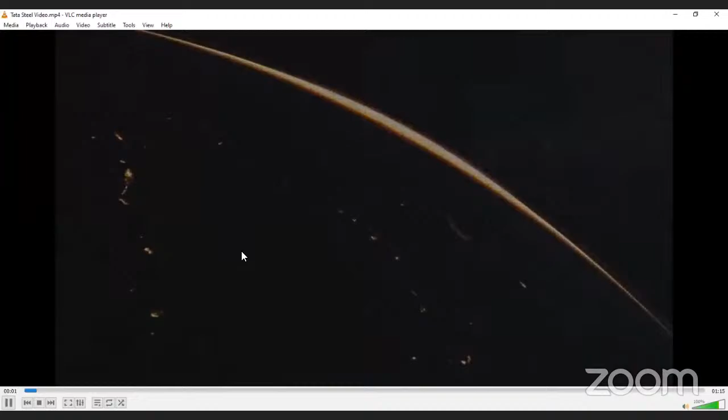Every living being needs a home, be it a hole in the wall or one with a swimming pool, be it on a high-rise or in the basement, be it a studio apartment or a grand piece of architecture, be it with a sky roof or one with an ocean view, be it a cabin in the mountains or a shack beside the sea.

Every living being needs a home, because only a home makes the world feel safer. This Environment Day, renewing our commitment to keep all homes safe, clean and green, and abundant with fresh oxygen.

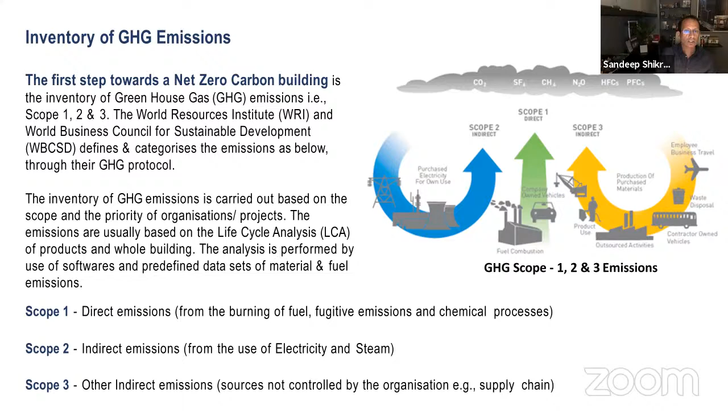The life cycle analysis is one of the important aspects for the carbon emission calculation. This is a very important chart. This tells you what is the current situation.

These are some of the very important abatement strategies. We as architects, developers, promoters, contractors, and everybody can adopt this - maximizing energy efficiency through passive architecture. Passive architecture plays a very important role. You have to have a climate responsive orientation of your buildings.

You have to have a proper envelope strategy. You have to use proper MEP and other engineering so that your reliance on active measures is less. Reduce operational energy demand and consumption, eliminate fossil fuels, and embrace clean, safe, and connected mobility. Use e-vehicles, provide on-site renewable energy and storage where possible.

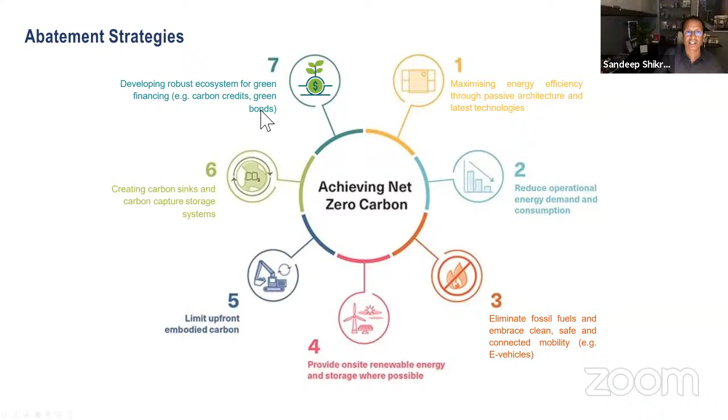Creating carbon sinks and carbon capture storage - look at the country of Bhutan, they are generating more oxygen than they are generating CO2. So they are actually carbon neutral and actually a positive kind of country. And developing a robust ecosystem for green financing, that is carbon credits and green bonds. You need to incentivize the good people who are looking towards it.

Here you can see each material wise, its quotient as to how much CO2 per kg of that material. So 1 kg of aluminum will generate 11.5 kg of CO2. These are also an index for entrants to understand, while they are using the material, how they are contributing towards decarbonizing the building.

CEU data suggests that 85% of the floor space will be residential used by 2050, while 15% will be used for commercial purpose.

For our target of 2 degrees Celsius, according to IEA, the average building energy use per person per year globally needs to fall by at least 10% to less than 4.5 megawatt hours by 2025. These are some of the targets which have been set, which are quite convincing, and numeric measures for all architects and engineers to follow.

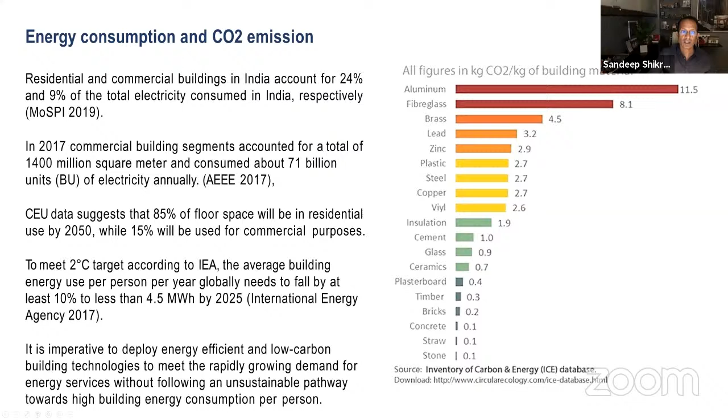This is Portland pozzolana cement, with lower CO2 emission per ton of cement. Very excellent cement, has higher long-term strength, reduction in permeability, increase in durability, resistant to wet and thermal cracking.

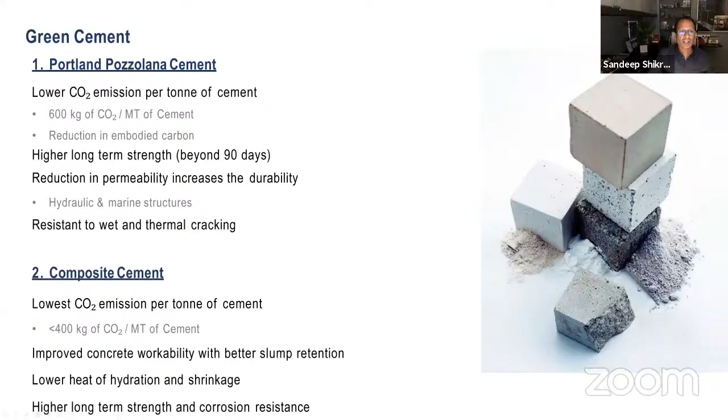Composite cement again has very low CO2 emission per ton of cement, improved concrete workability with better slump retention, lower heat of hydration and shrinkage, higher long-term strength and corrosion resistance. So you have enough opportunity to use these excellent materials while going ahead with your new projects.

This is high performance concrete, which reduces the size of structural members. Today you can go up to M60, M100 concrete, which will produce at a very highest level of quality. That also reduces construction material requirement on site, reduces member size, increases usable area. It's higher seismic, crack propagation, and abrasion resistant. These facilities are all available thanks to our concrete technocrats and concrete manufacturers.

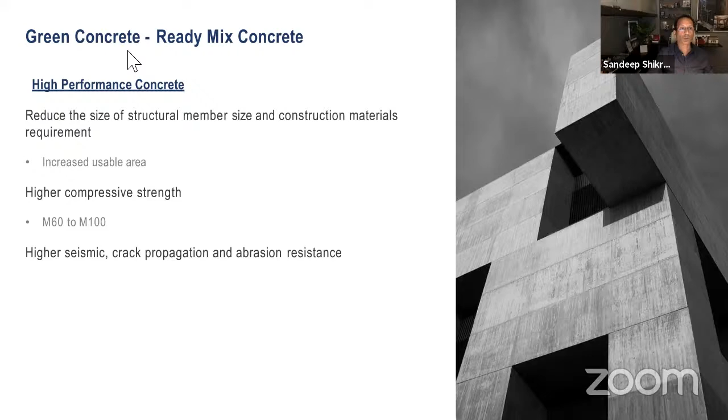When we come to glass, glass is very close to my heart. I'm the one who has been using glass in abundance. It's a myth that glass is an energy guzzler, that glass is in conflict with sustainability. Glass is a wonderful material if you use it carefully. It uses the least amount of impact on the environment, and it has very green processes.

It also occupies less space. It's quite state of the art in terms of its assembly, in terms of its execution on a high-rise, high-density project, and most importantly, it gives you a seamless connection with nature. It's also easy to maintain, and the life cycle and longevity is wonderful.

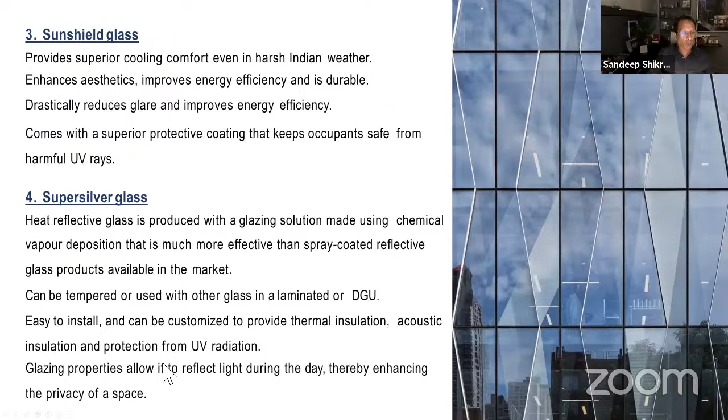Super silver glass is a special technology where, as an architect, we have a craving to have a clear substrate but better performance of the glass. These are special patented technologies which allow the glass to maintain visible light transmission and clarity in terms of seeing nature and sky, but give better performance in terms of protection from UV radiation and other parameters.

So these are some of the initiatives taken by people whose materials have been extensively required for our built environment. Government of India has taken a great step.

They are leading from the front.

These are various very competent and reputed organizations under the Energy Conservation Act. They have formed codes and standards: Energy Conservation Building Code 2017, National Action Plan on Climate Change, Perform Achieve and Trade State Schemes, National Solar Mission, Swachh Bharat Mission, Green India Mission, Smart City Mission. Each of these codes and standards will give you a lot of insights to enhance your performance towards net zero carbon.

National Energy Policy, Sustainable Public Procurement - there are so many codes which are already there, and many more are on the way. So this takes you through what is the policy for building materials.

The fly ash utilization policy, amended by MoEFCC in 2016, actually drove the market for building products containing fly ash, such as AAC blocks, fly ash bricks, and Portland pozzolana cement. These are all very thoughtful, well-tested materials, and they are today quite well available at a competent rate. The industry is fully established and stabilized to give you that kind of confidence, and this can be utilized in a very judicious manner.

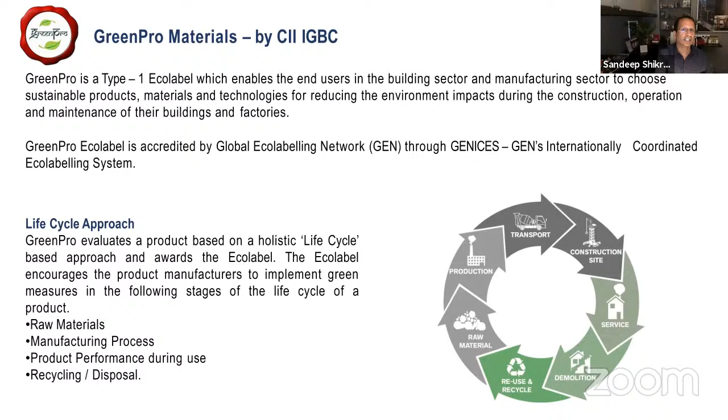GreenPro eco-label benefits include saving time and effort in carrying out due diligence, which has already been done by an expert team. It gives assurance about the performance of the product, ensures toxic and hazardous substance-free products, which in turn enhances health and well-being, improves product performance, reduces resource consumption and environmental impacts, and gives recognition and credits when you want to go for green building or green co-rating systems.

For the manufacturer, it gives differentiation from competitive products and increases market reach. Once you're flashed on the eco-label product, you have wider exposure to clients and users. It's easier to convince specifiers because you've been vetted and labeled by an independent agency. It enhances resource efficiency during manufacturing, sets you a goal for the next stage, and it's always better to be part of that competitive evaluation methodology. It acts as a driver for achieving environmental excellence and enables innovation.

GreenPro's evaluation criteria covers product design, product performance, raw material, and manufacturing process - including how the manufacturing process is also green. It looks at a complete holistic approach from beginning until the product is fully manufactured: what waste is generated, how that waste is recycled if possible, how it is disposed of, and how it has been tracked through life cycle analysis.

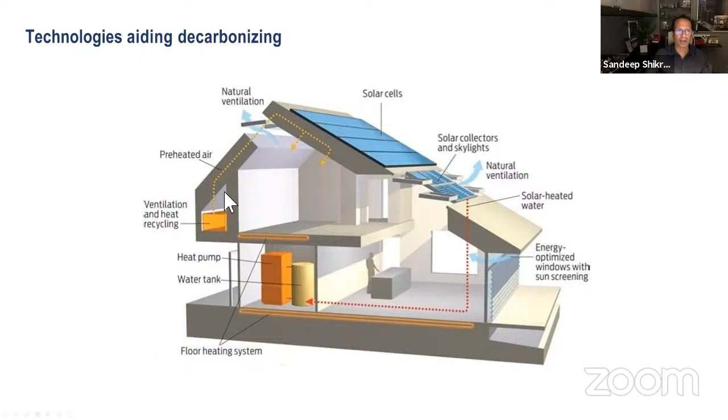When your passive planning threshold reaches, you start relying on active planning, and you have several opportunities to go for active planning - renewable energy, energy efficient heat pumps, proper materials with less embodied carbon, and so on. If each of these elements is handled properly, we have already reached net zero energy, net zero water, net zero waste technology, and the measuring system. Very soon we are going to establish a net zero carbon rating system.

So that is how the overall thing works. Our aim is to collectively get to net zero emission as soon as possible and remove carbon from the atmosphere. The building industry is now tasked with doing more good by reducing net emission to zero and actively contributing to carbon withdrawal. These are the methods to balance, optimize, and eliminate CO2 emission and reach towards net zero carbon.

The responsibility is to incorporate this into your design properly right from inception - buy local materials wherever possible, ensure structural material strengths, don't generalize about optimizing different uses, reduce waste through careful specifications and buying with take-back agreements, and consider the longevity of the material you use. If it needs to be replaced frequently, its impact will be greater.

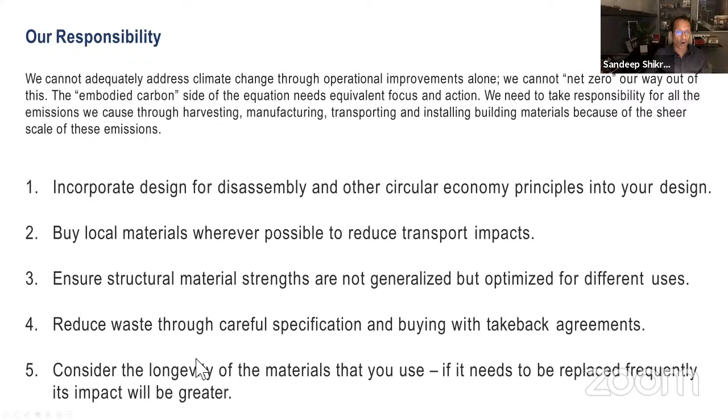The priority is integration of rapidly expanding cities, prioritizing high efficiency standards, accelerating action on building retrofits, facilitating maintenance and building management, and teaching them. I personally feel this should be included in the syllabus - we should create graduates in this. We should request educationists to involve this as one of the specialized subjects, because everything built has to be maintained and properly facilitated. We have a huge gap there - a lot needs to be done on the facility management front.

Also, appliances and systems - how do you stimulate the demand for energy efficient appliances? Material, of course, we've talked about. Today's session is on material, resilience, and clean energy.

Bhutan is one of the best examples - the only carbon negative country in the world. More than 70% of the country is covered with trees. This large tree cover has seen Bhutan become a carbon sink, meaning it absorbs more carbon dioxide than it produces. Bhutan absorbs roughly 7 million tons of carbon dioxide annually and only produces around 2 million tons. Bhutan also exports most of the renewable hydroelectric power generated from its rivers, counteracting the country's carbon emission contribution by millions of tons each year.

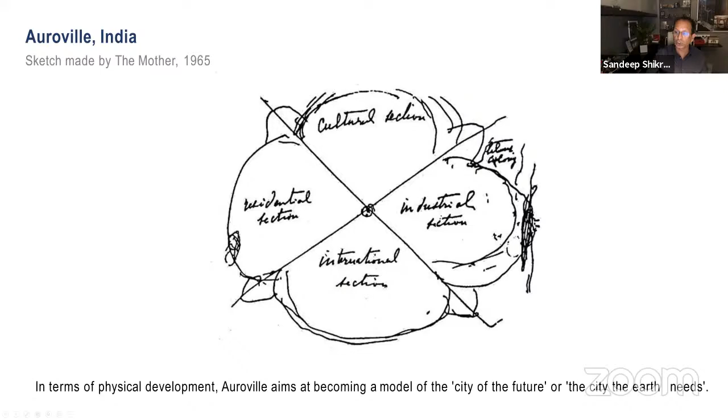A lot of good master planners have come up and set up this master plan. I would advocate all viewers to go on YouTube and social media - their sessions are available as recorded sessions. It gives you a complete idea of how this nucleus is being developed and how it is sustainable. You can see the road pattern, the outer ring road, the crown road, how they're pedestrianizing and taking away fuel emissions, minimizing environmental impact.

Moving towards completely self-sustainable, energy conservative, water efficient, almost net zero carbon emission scenario. If this can happen in Auroville, this model can be extrapolated even into a megapolis and metropolis. We have to be mindful how we take these pilot good case studies and adopt them in our own projects. That's what we need to do. We already have a lot of good things around us, but I personally as an architect feel responsible, and every stakeholder is responsible - together we can achieve the best.

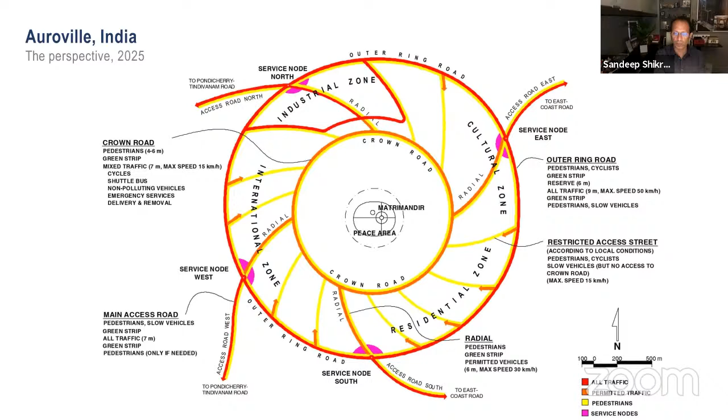This is also something happening internationally. You can see all the Scandinavian countries - Norway, Finland, Denmark, Sweden - they're almost reaching there. The scale is in their favor, but they have been taking this initiative for the last two decades, and their missions for 2030 and 2050 will definitely set a very good benchmark for all of us to follow. There is a lot around us that we should feel motivated about, and we can adapt. It's time for us to go in that direction.

A great saying of Richard Rogers, I would say at conclusion of my session: the only way forward, if we are going to improve the quality of the environment, is to get everybody involved. So it begins with us, it ends with us. We should be very mindful to take that active step, and we should definitely by 2050 achieve net zero carbon in our country. Thank you very much.

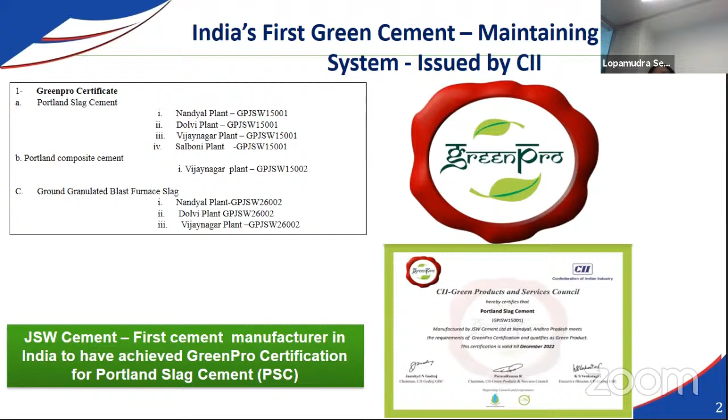...both for our products, Portland slag cement and GGBS. So calcium oxide content minimizing, because as we know, slag has got a very good and very high lime content, almost in the range of 40 to 43%. So if we analyze clinker and slag, we will see the calcium oxide content in clinker and in slag are almost to the same tune.

So it is a fantastic product which is lying there, and the dependency on OPC cement is a very big fascination for customers of South and West especially. East is again very advanced, they believe in a lot of blended cement, and they were the leading slag cement manufacturers.

So in South and West, they always say, no, we want dark cement, we want OPC cement, and they feel it is going to give them superior property. But of late, through a lot of work, meets, interactions with the various technical fraternity, awareness creation programs, conferences and participation, we have been able to raise the understanding of the customer with respect to the green product.

Because an individual home builder who is going to construct his home is not bothered. He will just give the contract to his contractor, or he knows a shopkeeper, or he will give the list to his person at the site. He will go and place material, whether they are green or OPC. And the next day, the mason or contractor sees the slab has hardened - this is fantastic, I don't care if it is green. It has to harden, and I need to get strength. I don't care about durability.

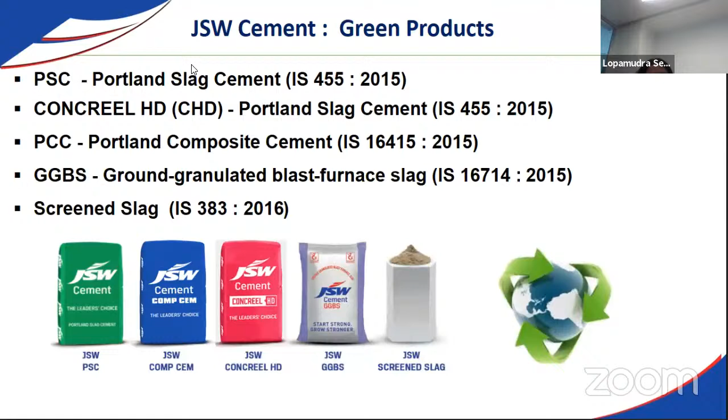So the slag-based product we are seeing here is OPC plus GGBS, which has been combined to make PSC. I will request Neelam Kumar to please take over from here.

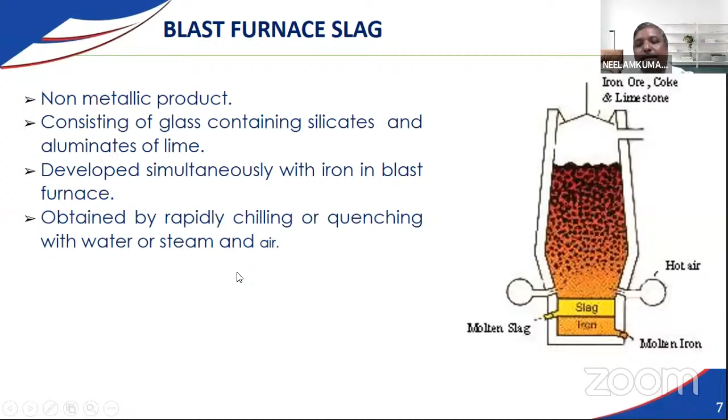So what happens exactly when this OPC plus GGBS, or the final product that is Portland slag cement, goes into the hydration system, how is the mechanism? As we are aware, whenever we add water to OPC, it gives some CSH gel, that is calcium silicate hydrate gel, and this contributes to the strength of the concrete or cementitious products. Calcium hydroxide is the weakest component, and whenever higher content of C3S, that is tricalcium silicate, is there, more calcium hydroxide is generated, giving about 61% CSH gel and 39% CH.

As far as C2S is concerned, that is dicalcium silicate, 82% of the calcium silicate hydrate gel is produced and about 18% of CH is produced. So as we are aware, if C3S is higher, then definitely one can get higher early strength in concrete. And if C3S is high, then higher heat of hydration will be there, which may cause the problem of cracking in the concrete, early shrinkage cracks in the concrete.

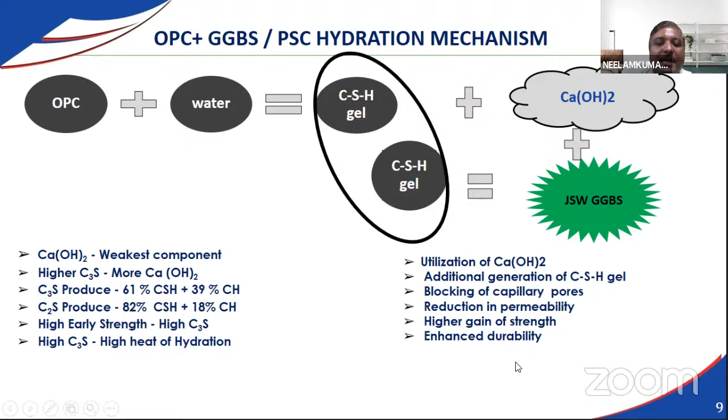You will need to conclude what you're speaking in the next 2 minutes. Sure, sure, definitely, for the first time. Okay, yeah, please.

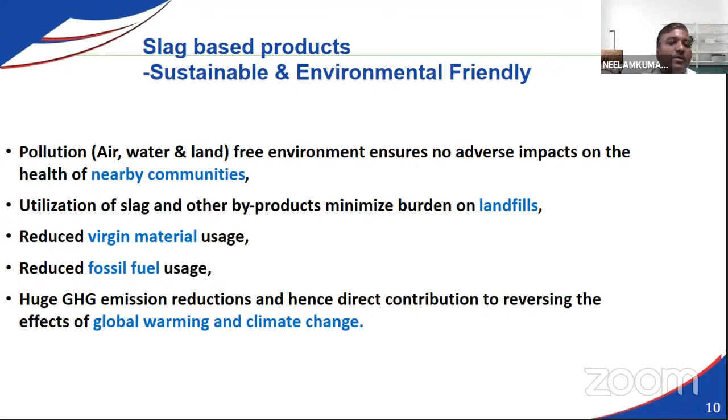So definitely we can reduce pollution in air, water and land by using this slag-based product and other products. We can reduce landfills, and we can definitely retain the virgin material of the earth. One can reduce fossil fuels also to manufacture cement. And as far as greenhouse gases are concerned, there is a tremendous reduction while manufacturing cement and cementitious products which are slag based.

While manufacturing cement in our JSW, we are tremendously reducing environmental impacts during quarrying, meaning dust, noise, fly rock. We are using 100% of the topsoil for horticulture and greenery, and we are replacing high speed diesel with substitute fuels. We are also using sprinklers to reduce dust pollution, and we have already implemented rainwater harvesting.

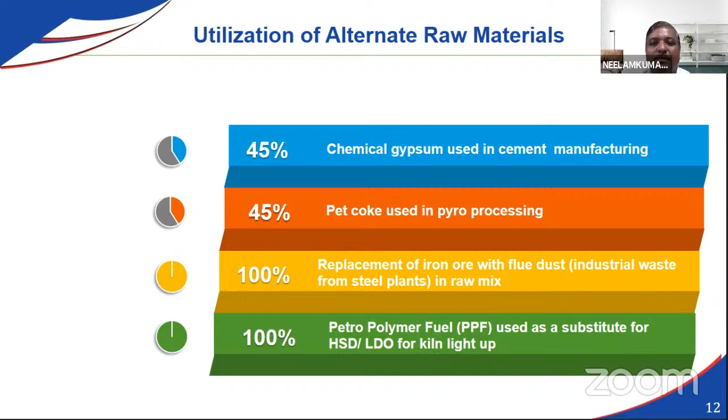There is utilization of raw materials like chemical gypsum, pet coke, and replacement of iron ore and PPF. By using these alternate materials, we are reducing limestone consumption to manufacture cement by 66%, along with coal, gypsum, and laterite. So we are preserving these natural sources for future generations.

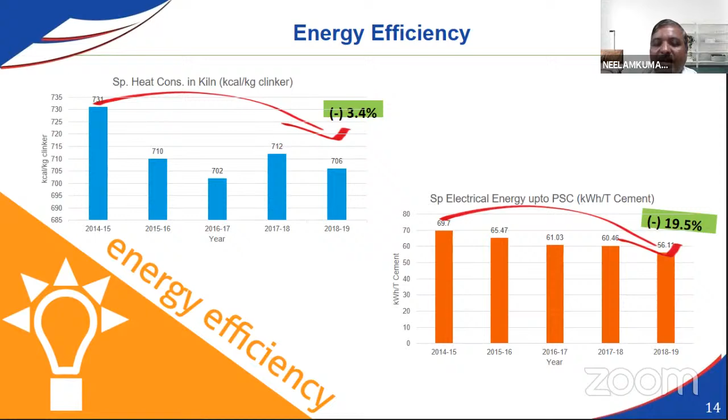As far as energy is concerned, we are efficient from an energy point of view. We have tremendously reduced specific electrical energy by about 19.5% while manufacturing our green cement products. As far as water is concerned, we have reduced consumption by 73% during process cooling in cement manufacturing.

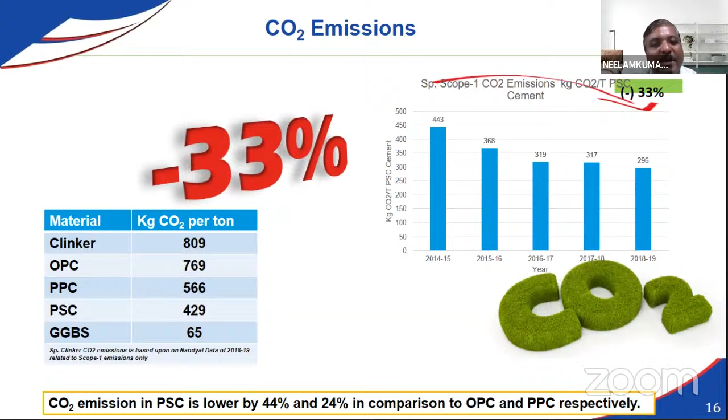As far as CO2 is concerned, while manufacturing OPC, about 769 kilograms of carbon dioxide is generated per ton of cement, but with PSC it is tremendously reduced by about 50%. So one can definitely reduce CO2 emissions while using and manufacturing GGBS slag-based products. This is definitely an eco-friendly product, composite cement as well as PSC.

And one can see while manufacturing concrete also, with 50% reduction in OPC replaced by GGBS, especially while manufacturing M30 grade concrete.

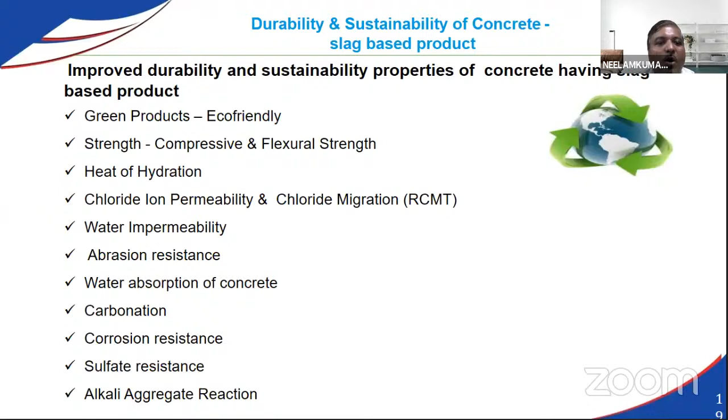So as a conclusion, green products are eco-friendly products. One can get good compressive as well as flexural strength, and heat of hydration is less. One can get good chloride impermeability, with very less chloride migration. Water impermeability, abrasion resistance, carbonation, and corrosion are also very less. These are all the properties one can get by using these slag-based products.

So even in the case of concrete, one can get good flexural strength and compressive strength, and these are results from NCCBM. As far as heat of hydration is concerned, it is very less in the case of PSC. This is based on RCMT test and chloride migration test, and we are definitely getting good resistance.

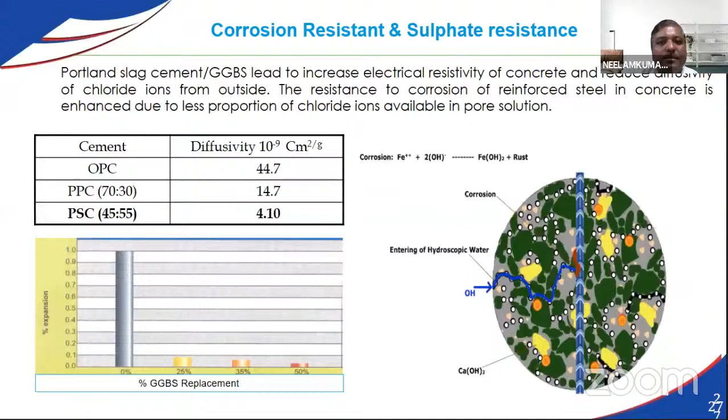So these are some of the final things we wanted to share under the umbrella of JSW. Thank you to the host for giving this opportunity to JSW.

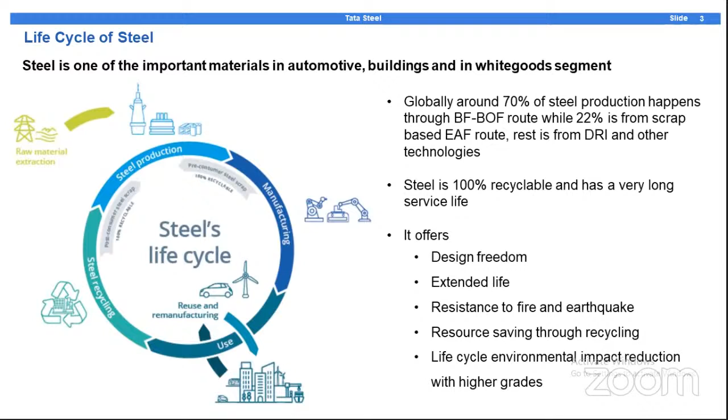So I'll start with the life cycle of steel. The diagram on the left side is showing the life cycle of steel. So steel is basically manufactured by extracting raw materials from nature.

Iron occurs in nature in the form of oxides, which have to be reduced by using the prevalent and popular reductant for reducing iron oxides, which is basically carbon, and that is where most of the generation of CO2 happens.

So it is the steel production first of all, and after that the produced steel will get into various other modes of manufacturing where various other products will get manufactured, and then those products will get used.

During use, there can be certain products which can be reused without too much of extra processing. And at the end of the life, the steel will get recycled. Major quantity of steel is actually recycled back into the steel production.

So from this life cycle, you can see that there are two methods of steel production. One is from the raw materials, which is from the green arrow. The other is by the steel recycling.

So globally, about 70% of the steel production is through the blast furnace BOF route, which is the green arrow part, the manufacturing from virgin raw materials, whereas 22% is from this scrap-based recycling in the electric arc furnace route. But in India, this proportion is a little balanced in the sense that EAF route would be around 55% and BF-BOF route would be around 45%.

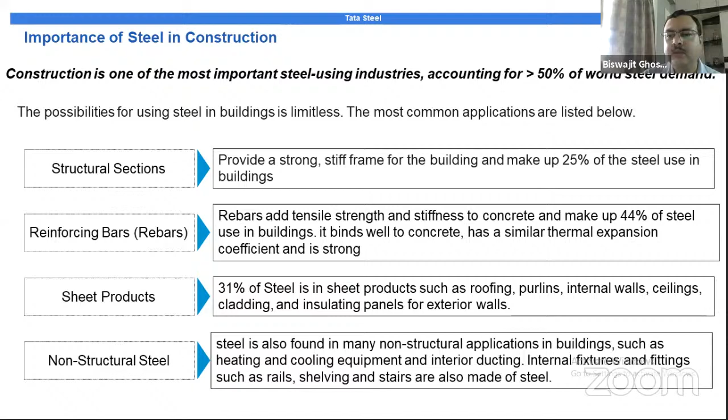sheets, which are used in roofing, which account for about 28 to 30%, leaving only a very minuscule fraction for use in other non-structural usage like fixtures and others. So structural sections and reinforcing bars are the main usage of steel in construction.

Challenges for steel sector decarbonization. Steel is a hard to abate sector from the decarbonization viewpoint. This is because, as I explained, the iron occurs in nature as iron oxides, and they have to be reduced to take out the iron from the oxide.

And the main and the easy and the most prevalent and popular method of reducing the steel, so getting the steel out of the oxide, is by using carbon. So as a result, there is quite a bit of carbon dioxide emissions which happen, and the steel sector ranks among the heavy industries in terms of 8% CO2 emission.

It is very much highly dependent on carbon fuel, which is coal and coke as a reductant. There are technologies for deep decarbonization, but these technologies are at an early stage of maturity. They are now starting to become commercially viable. Most manufacturers of repute are actually looking at various variety of these technologies to adopt in the coming times.

It's also a capital intensive industry, so the challenge is that a lot of capex is already sunk in. So what happens with all those capex? In those cases, the CO2 emissions need to be managed and mitigated, if not brought down to very low levels.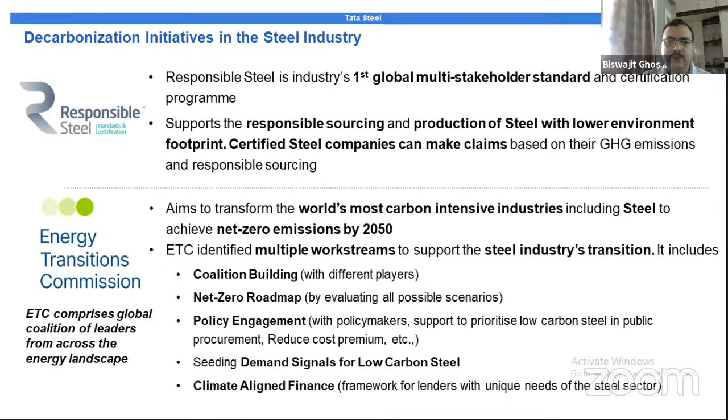Defining green steel products: the term green steel is not really well defined. It is left wide open for interpretation. Sometimes it means steel produced using breakthrough technology, or mainly from scrap recycling, or from reused and remanufactured steel, or sometimes it even means conventional steel but with an emissions offset program where emissions are lower. There is no globally accepted standard definition for this, and World Steel Association does not use the term green steel due to its lack of clarity. They rather use the term low carbon steel.

Having said that, while there is no real standard for green steel, there are various sustainability initiatives in the industry at the product level. It is very important for the steel industry to explain those facts to end consumers, so that they are aware and can make conscious, educated decisions on purchasing or selecting.

Sustainability looks at all possible opportunities for improving the product's environmental impact. Some of the initiatives include carrying out LCA, or life cycle assessment studies, to detail out the life cycle impact of steel products, including the possibilities of recycling and its benefits.

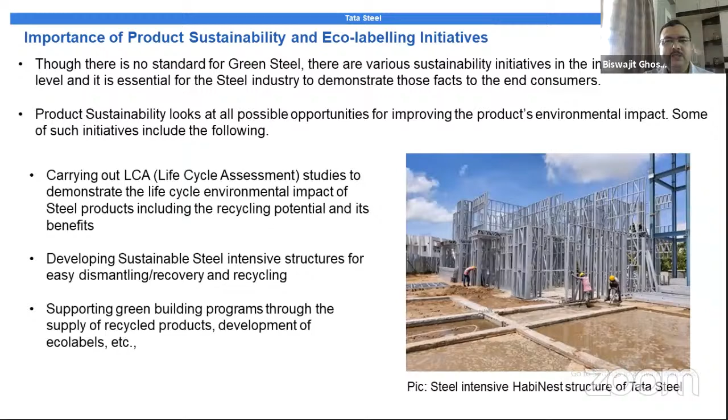The opportunities are many, as shown in earlier presentations also. Steel falls under the 11% of materials-related emissions in the building sector. So to achieve net zero carbon buildings, green steel literally should mean a steel product with zero carbon footprint, but that practically does not happen as of now, and we are a long way off from that ideal state.

So what happens is there are environmental product declarations which are becoming a requirement in the building industry, to ensure transparency of the product, and companies have to start disclosing the environmental impact.

GreenPro framework for rebar is a unique, one-of-its-kind national initiative that recognizes rebars having better sustainability performance. I'll cover it in a little more detail in the subsequent slides.

Mr. Ghosh, for want of time, maybe in the next 2 minutes if you can conclude. Yes, I will try to, I'm almost near the end of it. So Tata Steel's challenge, what are the initiatives Tata Steel has been doing?

The company's initiatives: first of all, Tata Steel is a member of the Responsible Steel Certification Program. Tata Tiscon, Tata Pravesh steel doors and windows, Tata pipes and structurals, and slag cement are all GreenPro certified products. All the construction products are now GreenPro certified products. Also, we are hugely into development of environmental product declarations.

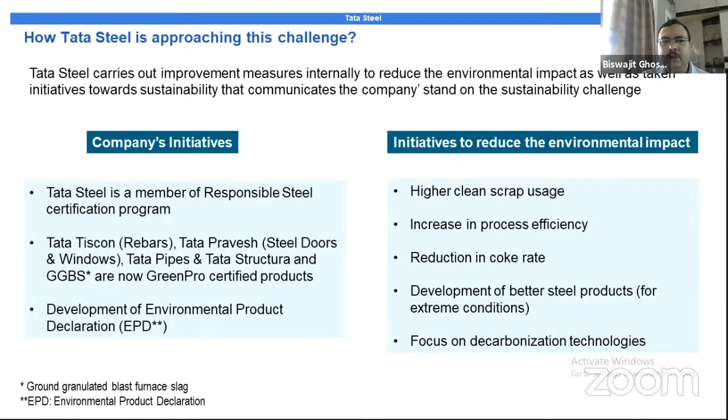Just three major items: CO2 reduction, currently in the BOF route the CO2 emission is typically 2.5 tons per ton of crude steel. We want to reduce this to 2 tons or less by 2025. Fresh water consumption, currently around 3.2 meter cube per ton of crude steel, we want to reduce to less than 2 meter cube by 2025, and achieve 100% sites under LCA coverage by 2025.

These are all very tough and tall targets which we have taken up. Okay, so this part has been covered earlier, so I'll skip the last two slides.

GreenPro framework for steel rebars. Two years back, there was no framework for GreenPro certification of steel rebars. As you know, steel is a very important and major item in any building construction, so it could not happen that steel was not covered under any GreenPro framework. So that framework had to be developed, and we collaborated with CII, GBC, and various other stakeholders.

To develop the framework in the last two years, and we have now been certified. This framework takes into account product performance, with a weightage of 30%, and process-related performance with a weightage of 70%, and the various weightages are as given in the parentheses.

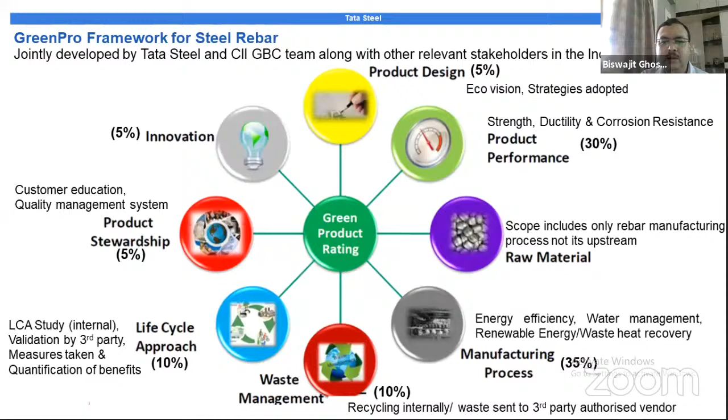So, last slide for the benefits, main benefits, it has been covered in earlier presentations also. The main benefit is for the users. Without spending too much time and effort and racking their brains, they can easily understand by looking at the stamp whether the processes and the product are sustainable, and environmentally more sustainable, so they don't have to get into details of complicated technical data. The product performance is also better in terms of longevity of the structures, and toxic and hazardous substances are certainly not used in the manufacture of these products.

That's all that I had to say from my side. Thank you, and sorry for rushing through.

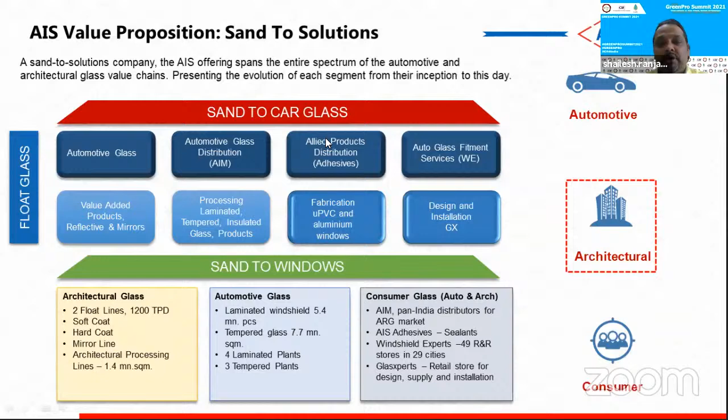So I'll mostly talk about the product, what kind of product can be called green glass, and how it has to be used and selected. If you see this one slide about our company, it talks about sustainability being in the DNA of AIS, because we are present in every part of the value chain, be it automotive segment or architectural segment. Being present in every part of the value chain, it becomes our responsibility to provide a product which is sustainable and can be used in different typologies as per different requirements.

Now the question which always comes up everywhere is, is glass indispensable? Nothing is indispensable, but yes, to a building it is indispensable, because of various reasons, not just one reason.

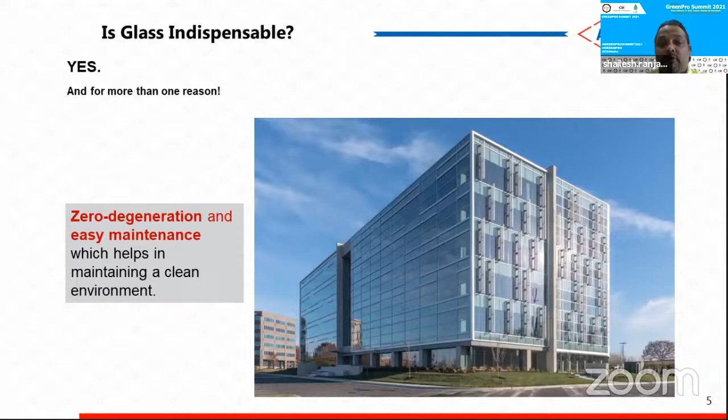Aesthetic, obviously it is good. It is a sustainable material. When we talk about sustainability, it is long lasting with zero degradation. From the green product point of view, the lifespan is high. It is lighter to the building, so the overall dead load of the building is reduced.

It is transparent, and as mentioned earlier in the presentation, it is multiple times recyclable and reusable, so any number of times you can recycle and reuse this product. During the manufacturing process, we also use broken glass as raw material, which reduces the use of virgin raw material, making the production of this product sustainable too.

So yes, there are multiple reasons why you can consider glass as indispensable for building material. There are different kinds of products, so it is very important to understand what kind of product is available and what you should use in a building. If you are not able to select the right product, that's where the actual problem starts. If you use the wrong product and expect it to perform as per your expectation, it is not going to happen.

In the presentation, in the green glass part, Mr. Sandeep Sikre rightly mentioned the high performance glasses, which you can see here in the coated glass range - hard coat and soft coated products. These kinds of glasses are primarily helpful in reducing your overall energy usage and heat ingress in the building.

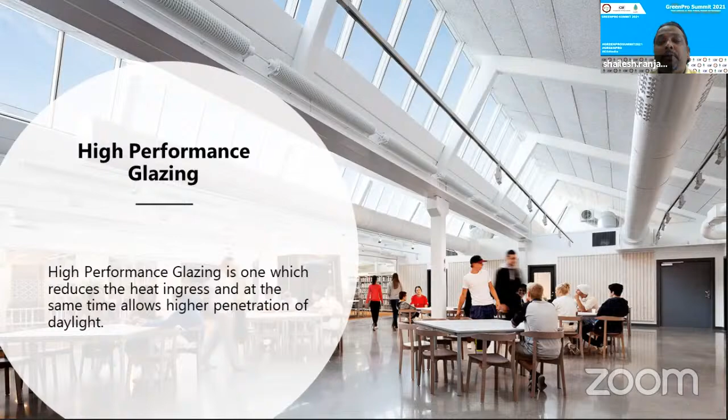How it is done, we'll see in the later part of the presentation. What is high performance glazing? A high performance glazing doesn't mean that it has to be expensive. Basically, it has just two basic purposes. First, it should reduce the heat ingress in the building - normally I'm considering India as a tropical country, and basis that I am giving this. So it should reduce the heat ingress and allow optimum daylighting in the building. If glass is able to perform these two, it's called high performance glass.

And what it does is give you overall energy savings of 10 to 15%, and the payback period which used to be around 15 to 16 years earlier is now as low as 2 to 4 years. In addition, a high performance glass gives occupant comfort, which is also a criteria in green building rating regarding indoor environment quality.

What are the different advantages of these high performance glasses? As I mentioned, it reduces your overall cooling load, so your AC load will reduce. Not only that, it may also reduce your capital investment on the tonnage requirement in the building for the AC, because this glass reduces the overall heat ingress, so you don't require that kind of capital investment in putting cooling equipment.

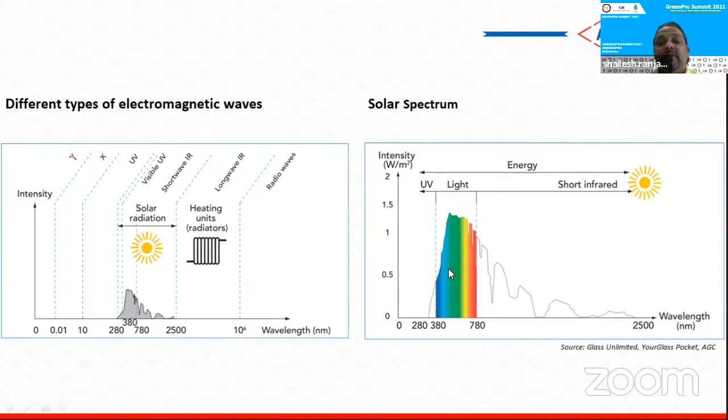Now, when we talk about the approach, I'll not go into detail because of the paucity of time, but I'll tell you in brief what glass basically does. Glass allows light to transfer - the wavelength to pass from visible light - and reduces all the infrared. So basically, it spectrally selects the wavelength and allows only the right wavelength to pass through. Most of you are already aware, but there are three specific terminologies you should understand.

Light transmission should be optimum - not high or low. In Indian climatic conditions, SHGC, which reduces direct solar heat ingress, should be as low as possible. And U value depends on the type of building - it should be optimum and will purely depend on the type of building where it is used. That's where this spectrally selective glass has to be used.

Normally, if you use a normal clear glass thinking it will serve your purpose, it never will, because it is not able to cut the infrared, which a high performance glass is able to do. That's why it is important for you to use high performance glass. And these high performance glasses are GreenPro certified - at least from our company, we ensure that all the products we offer are GreenPro certified.

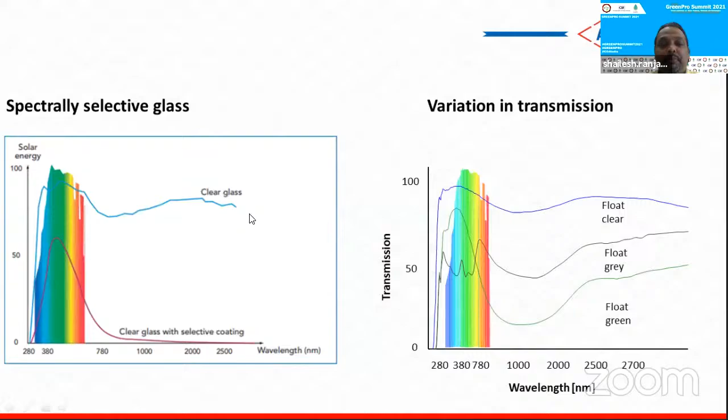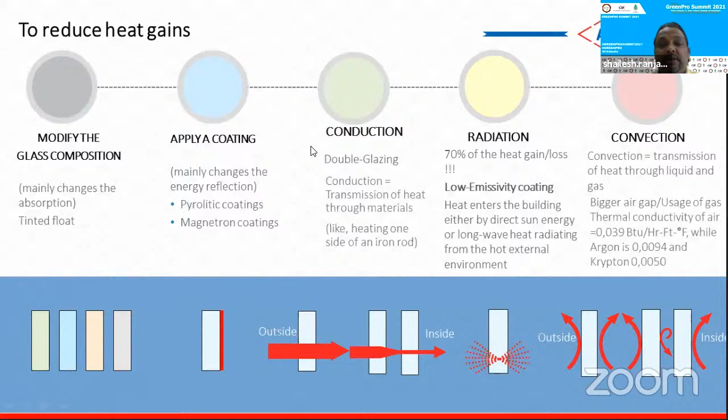There are other criteria like energy performance, lighting, safety, and parameters like acoustic and fire which you should consider. Now, how will you reduce heat gain with the help of glass? You can apply coating to make it high performance glass, reducing conduction, convection, and radiation. Or you can go for a double glazed unit, which can reduce your U value from 5.8 to 2.9. Then if you add low-E coating, it can reduce further from 2.9 to 1.4, even 1.1. But it all depends on how much you actually need - you don't need to go for 1.1 in India. Maybe 1.7 to 2.8 should be more than sufficient for almost 80% of buildings.

So that's where the design comes into the picture. What is the right approach? Whenever you are selecting any product, remember there are different criteria you'll have to consider - acoustic, wind load, rendering, lighting, energy performance, shade. That's why we call it a 360-degree approach, not just a unidirectional approach when selecting the product, because one product may give you one solution but may not give you all. That's why you have to look for the product which gives all the solutions, and that's where you'll be able to achieve sustainability without compromising on safety, security, and other features.

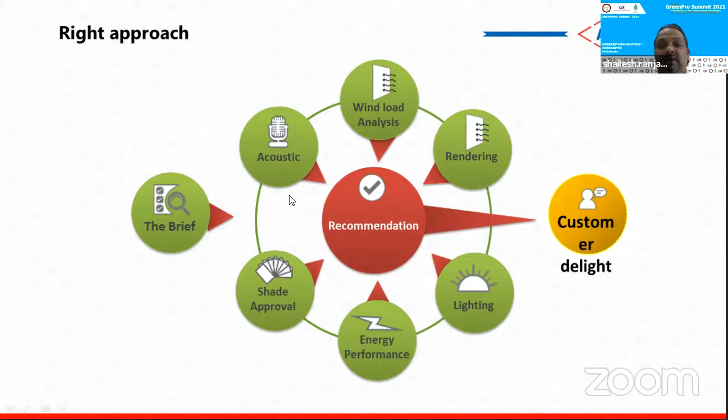There are different tools available which can help you do this kind of analysis, like daylighting - you don't need to actually go into the building to see that. There are computer-aided programs which can help you do all this analysis and give you the selection of the product. You can also go for rendering of the building to see how it will look before it is actually operational, so that visualization is also available.

Now I'll stop my presentation here, but before that, Shailesh, if you can just conclude in 2 minutes.

Concluded now. So there are too many digital initiatives which are there - you can go through those and refer to all those things. But the last statement before I conclude is that you should first give a thought before using any kind of product, so that it can become sustainable.

Thank you so much, sir, for the time. I am sorry in case I rushed through my presentation.

Actually, the apology has to be from my end. I think I needed to have paced it a little differently. The first few speakers got a little more time, and we had to rush the last two speakers. So my apologies for that.

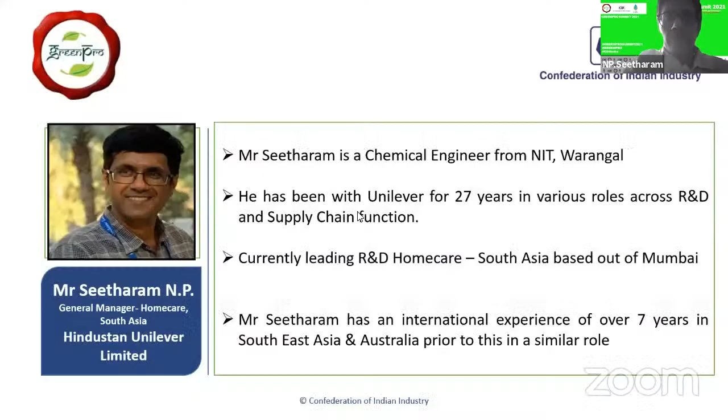So maybe we can have the first speaker come online. The first speaker is Mr. Anil Chopra, who is here as the head of quality from Camfil India Private Limited. This is an area where he has been at the forefront, with a lot of experience in various consumer durable companies and a broad-based background. He's also a member of various societies and a panel member at BIS for air filters. In his current role as head of quality for air filters, he's leading this particular space, and he's one person who can bring a lot of insights into sustainable products. So over to Mr. Anil Chopra.

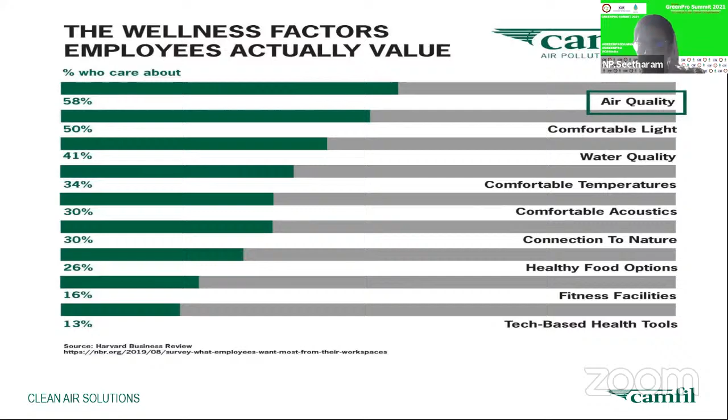Coming to Camfil and United Nations goals, there have been different goals, and linking Camfil with these, we are very much aligned with good health and well-being of our employees, decent work and economic growth, sustainable communities, and responsible consumption and production.

Sustainability is a part of our DNA. Since inception, Camfil has been promoting sustainability, and we are enabling and educating our customers about the importance of sustainability and energy saving.

As rightly said by different leaders, awareness can only make an impact. Awareing the industry with the right process and the right standard will definitely work. No doubt it is going to take time, but as rightly said by Sandeep Shitkar, it has to be incorporated into persons who are studying in college, so that it comes into their curriculum and into their DNA.

As mentioned in the morning felicitation, Camfil is now also GreenPro Eco-Label certified. It has been a great pleasure and privilege - this was not known to me before, so thanks to CII IGBC and Hemant for this concept, through which we came to know we need to have the right things in the right place.

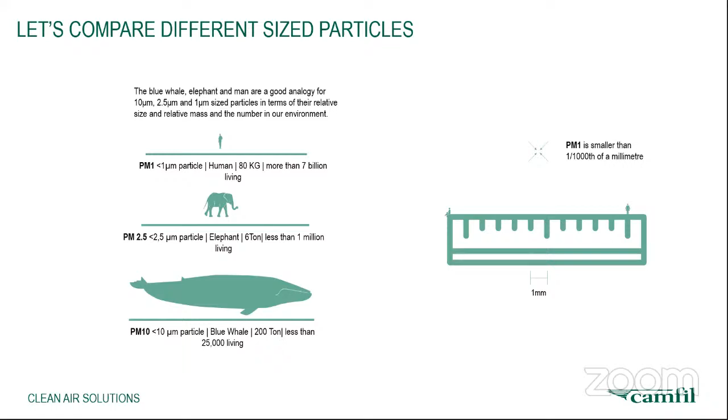Now, how does the penetration work? If we talk about PM10, which I showed you, it's quite bigger particles, and by God's grace and our natural design, we cannot inhale that. It will come out from our mouth. If I talk about PM2.5, these are the fine particles which go into our lower respiratory tracts and deposit there. PM1 is less than 1 micron size, and these are inhalable particles which go into our alveoli, and less than 0.1 micron particles, which are ultrafine, go into our bloodstream. So these are the things which show how it impacts our body.

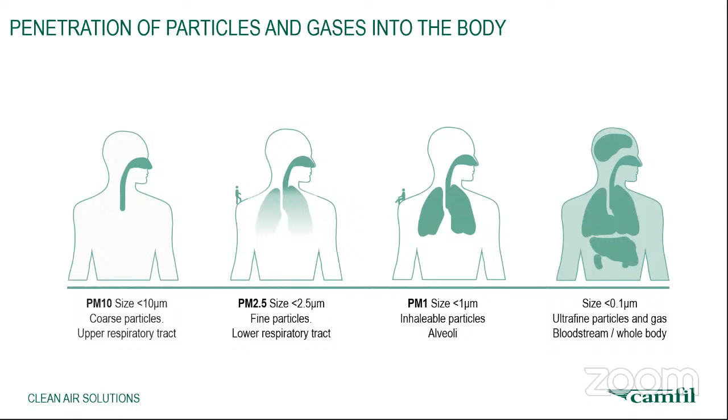If I talk about air pollution, there are certain facts which we almost ignore because it's COVID time, and we say the situation is really scary, but presently we are sitting in the headquarters of air pollution, where 7.3 million people die prematurely. Air pollution is the 4th largest killer in India, and 15 of the top 20 polluting cities are in India. I think 3-4 cities will be near this place, near the NCR.

These airborne diseases are silent killers. They will not impact you in the short term. These are going to take you long. After some 4-5 years you will see cases of strokes, neuro disorders, respiratory disorders, asthma. So these are things which come into play as age passes.

There is a fact from Harvard University that there is a 15% increase in the death rate due to COVID-19 related to this.

Now coming on to protecting the ventilation system, we are talking about green buildings. 20 to 100% of outdoor pollutants are transferred into the building and have a large impact on indoor air quality. So the air filtration system plays an important role to stop those particles at the inlet level itself and provide fresh air to the outlet. To maintain the function of the ventilation system for a good number of years, it must be effectively protected, both at the intake and the exhaust sides.

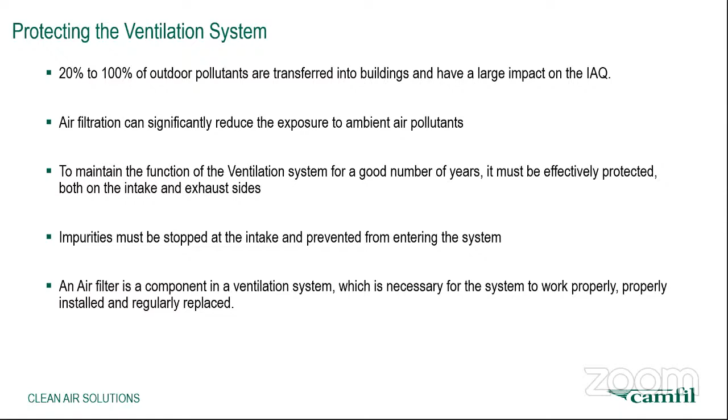There are certain good practices which contribute to better indoor air quality, such as keeping the system clean, which means that the designed airflow is maintained, and temperature and humidity are kept within specification. These are 3 important factors when we are designing the AHUs and placing the filters into them.

A clean system operating with the defined airflow reduces the amount of indoor contaminants generated by humans, building materials and equipment. So we need to maintain the efficiency of the equipment, allowing fans, heating and cooling equipment to work efficiently, maintaining low pressure so that the fan's energy can be reduced and used further, and preventing decrease of efficiency of fans due to dust accumulating in the impeller and casing.

And one more thing, there is a concept called pro-safe, meaning we need to make the process a safe process. Generation of microorganisms is always dangerous to any system, so now there are options where we can put filtration systems which prevent these microorganisms.

Now, the life of a filter. It starts with raw material and all the transportation, because if I talk about a filter, there are three parts which make it: the frame, the media, and the adhesive. These three components make a filter.

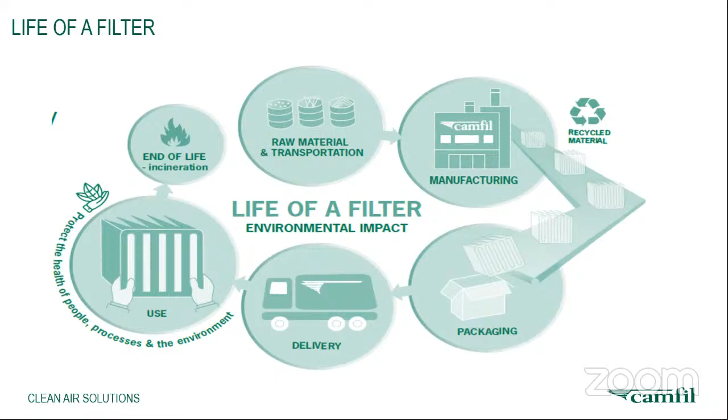Those are the things which complete the life cycle of the filter. Now coming onto the standard, I'm very much attached with standards because I always look for reference values, what should be the target values where I can keep my process near to. If I talk about the theme of World Standard Day last year, it was protecting the planet with standards. So standards play a very major role.

You can see, by comparing certain defined product properties, or equal measuring of different products, or simulating or measuring performance behavior, these are basically keeping any manufacturer at one platform, so that there is a common standard which checks these levels.

Mr. Chopra, now coming on minutes, you have a couple of minutes to wrap up. Okay. In air filtration there has been a lack of awareness, and Camfil is playing a major role in educating the customers. There has been a shift from European standards to ASHRAE standards, and now ISO standard. So EN 779 is basically now obsolete, and the standard ISO 16890 is already live. So in the market, ASHRAE and ISO standards are rightly working.

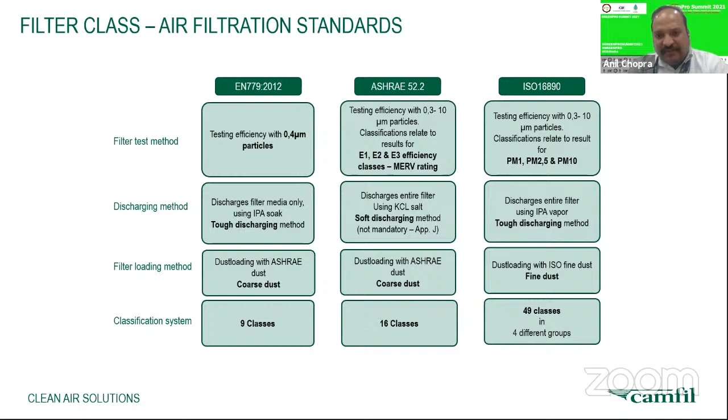And solution products, you can see the panel filters, bag filters, compact filters, which can be used as per the desired requirements.

Then this is basically a standalone unit, the City M of Camfil, which can sense and absorb the VOCs and particulate matter. And in a running condition of a City M, in just about 15 minutes the room has reached ISO class 8 clean room level. That's the beauty of this product.

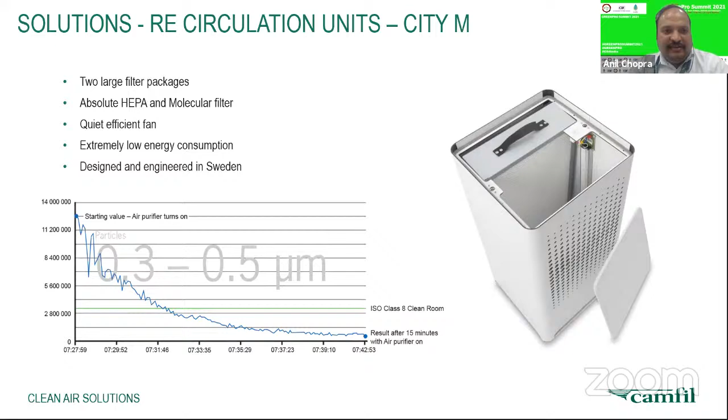It has low energy consumption and a quiet efficient fan. These are basically products which can play a major role in hotels, clubs, restaurants, industries, airports, residences, corporates, gymnasiums, wellness centers, and educational institutes. They don't cost much, and can be placed anywhere - wall mounted or standalone.

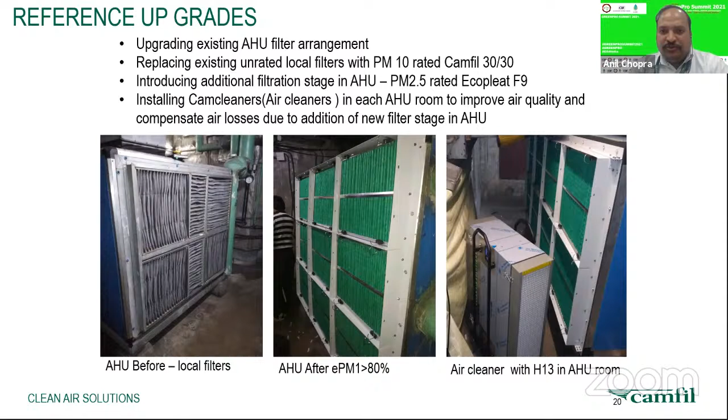It provides greater lower risk assessment, healthier occupants, less cleaning required, very low noise level, and certified filters meeting the standards. These are some case studies, where before and after pictures have been shown, where we made sure that the requirement of the customer was met.

You can also see the reading - before installing these filters the AQI was 188, and now the indoor level has come to single digits.

Then this is a chapter in the air filtration industry where we talk about washable versus disposable filters. As many leaders have talked about, we need to protect water also. When we talk about washing a filter with water, I've heard that normally they wash it 10 to 15 times, which disturbs the filter, and the purpose of the filter is not met. So it's always recommended that a filter should not be washed.

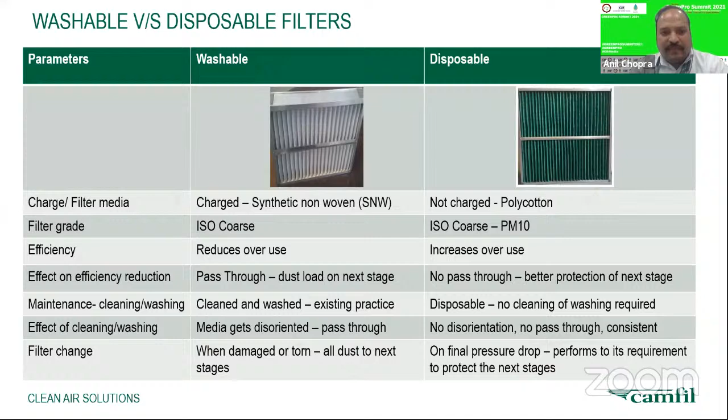Now coming onto the business areas of filtration, we are into HVAC, air pollution control, GT systems, power systems, and molecular contamination controls, which is air filtration for harmful gases and odors.

About Camfil, we are a 55+ years experienced company. Globally we have 4,800 employees, 30 manufacturing sites, 6 R&D centers, and we are located in 31 countries. We are based in Stockholm, Sweden. In India we have 3 manufacturing sites, 2 in the north and 1 in the south. Our head office is in Gurgaon. We've been present for 39 years in India.

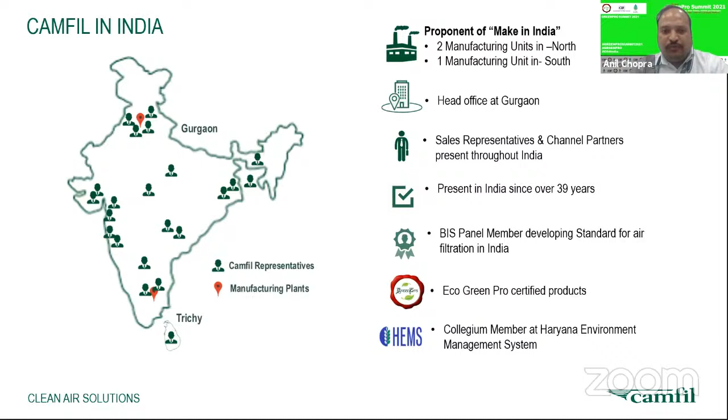We are a BIS panel member, and thanks to CII IGBC, we made our product certified as Eco GreenPro. We are also a collegium member at HEMS, so that we can work with them on sustaining the things, and disposing of hazardous products in the right manner.

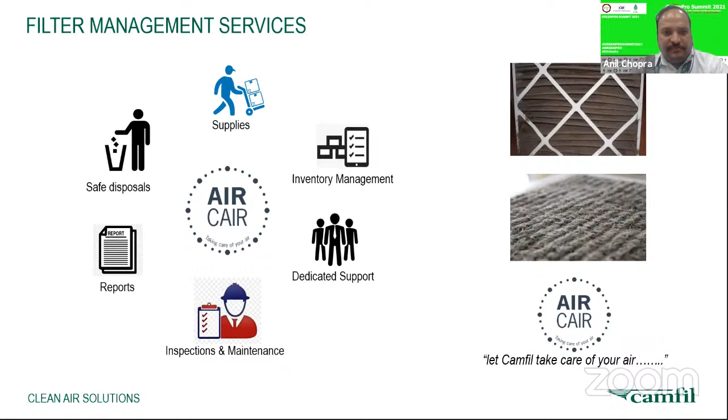Our vision, no doubt, is making clean air a human right, just like clean water. It was created in 1963 when the company was formed. Our mission definitely covers everything, protecting people, process, and the environment. We cannot ignore the environment, we need to take care.

I would like to share one personal experience of mine. I normally come from a place which takes 1 hour from the NCR region, and there are 2 companies in between, one throws some good smell and one throws some bad smell. So it's not like good smell is good for me, so I can inhale that. The moment I cross some kilometers and feel bad air, at that time it's in my mind that that's bad air, I cannot inhale that.

So good and bad, both air has to be properly exhausted to the environment, so that, as rightly said by one of the leaders, we have only one planet to live, and so we cannot just make it a bad environment. We need to take care of our mother earth, and that can only be possible with sustainability. So thank you so much.

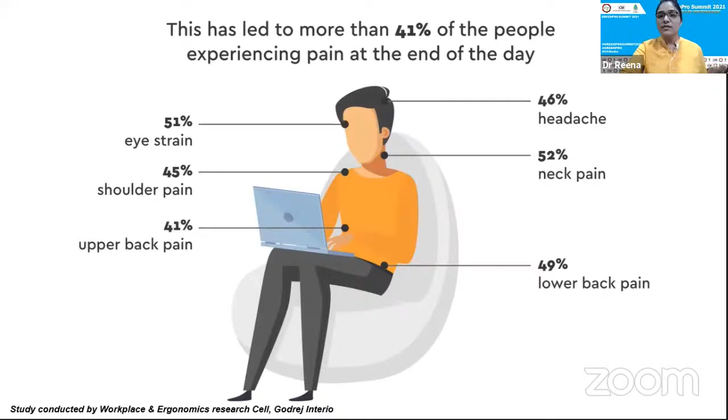Other insights were that sitting on a bed, beanbag, or floor causes you to go into a slouch posture. When you adopt this posture for even 1 to 2 hours at a stretch, and if that is your primary work desk, repeated every day, it causes fatigue and discomfort, and gradually leads to pain. So it's a very important area to consider as a major concern.

Secondly, considering the lifestyle, the work from home comfort, behavior, or safety part, the physical activity of users was another major area which is impacted. This is one of the contributing factors leading to occupational health challenges and ergonomic injuries, adding to the stress.

So it becomes all the more important for decision makers, space designers, or anyone designing a policy to consider these trends. When you bring employees back to the office space, or give them the opportunity to work from a hybrid remote space, we need to consider these factors so that occupational health is taken into consideration.

Also, we need to understand that no matter what, we are putting in a lot of hours at work. I don't know how many of you will agree, but as compared to office space, working from home has increased at least my work hours. Even during my interactions with employees and participants, when I randomly check with them, the first response is: yes, we are working 2 to 3 hours more compared to office.

In office, we were sure we have a lunch break; even during meetings we go and speak to people, there is movement, activity, and breaks. But while working from home, there's mental fatigue, which I would club as more of a virtual fatigue. So this is a primary trend we need to consider.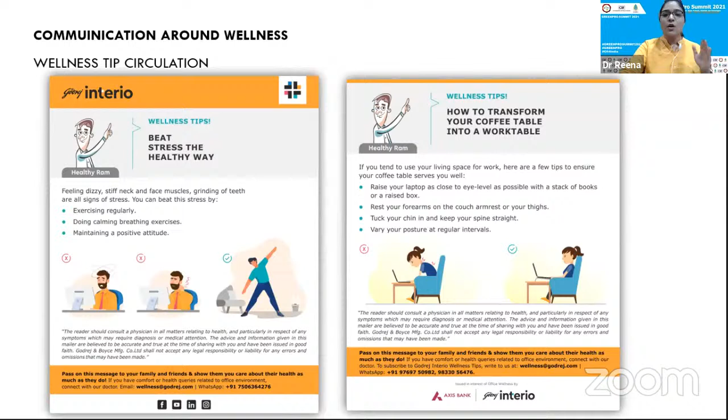So behavior can be taken care of through constant reinforcement of whatever changes you have made. We have taken an approach of weekly reinforcement from an ergonomics point of view, educating people - this initiative I've been doing for 10 years now. As an organization, we have reached more than 10 lakh plus employees with a simple communication about what is right and how to stop bad habits. So before I leave you open for questions and answers, I would like you to go through this simple video as a tip for you to practice.

It is just a 1 minute video on virtual fatigue. Is the video visible, Hemant? Yes.

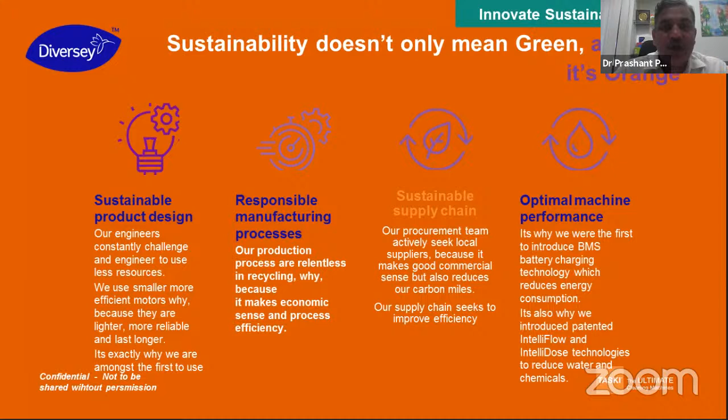These are the various benefits our TASKI range of products brings to our customers, be it through sustainable product design, responsible manufacturing processes, sustainable supply chain, or best and optimal performance. In the next slides, we'll show how this optimal performance brings sustainability.

Some flagship products like TASKI's Swingo deliver almost 76% water saving compared to our other units. If you try to measure the sustainability profile of these machines, it's endless in every space—be it less chemical consumption, water reduction, or productivity improvement. These machines play a very significant role for our customers everywhere.

One of the key solutions, or technology, here is that these machines can also help deliver cleaning without chemical—we call it chemical-less cleaning solutions.

So that's all about the technologies. And then we talk of...

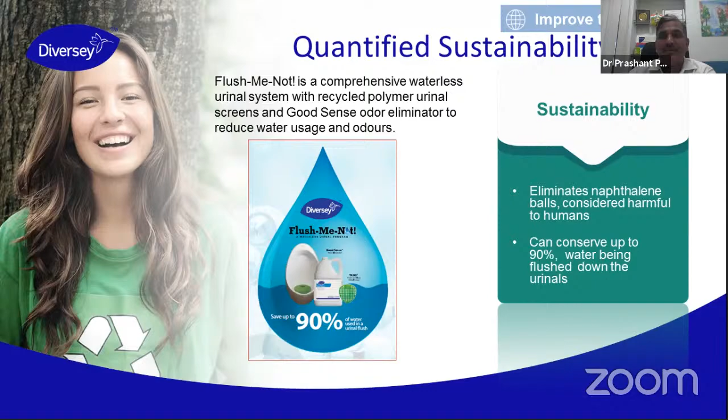Sustainability through water saving: the waterless urinal has been implemented all across the space. This helps us reduce the entire use of naphthalene balls and conserve almost 90%. Some of the benefits are very well known to all of us. And then some of the people-based, care-for-people approach is the Soap for Hope program, where the soap generated from the hotels is directly converted into soap bars without using any water or electricity.

So how do we choose a sustainable solution? Very clearly, 3 criteria: look for the right certifications, watch out how it helps improve people safety, and also look for the profitability improvement for our customers.

So to summarize, the possible green solutions for healthy buildings include criteria like biodegradable chemicals, super concentrates, environmentally friendly and fast-acting chemicals, and waterless cleaning solutions such as twister pads used along with our machines. This is how we deliver cleaning without use of any chemicals. I also talked about waterless urinals, reducing plastic through innovative packaging, and TASKI machines.

One key area where Diversey plays a significant role is designing the right SOPs for our customers, where performance can be optimized using pre-wetted systems or microfiber mops and dusters. We all know this earth is not ours; it is a treasure we hold in trust for future generations. So we work together to make our earth safer and more sustainable.

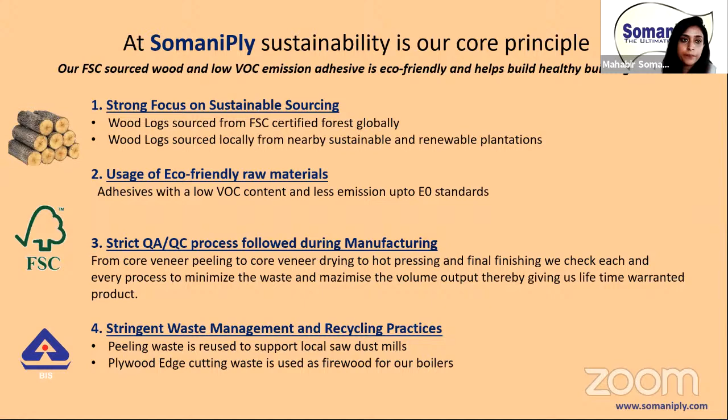Since this topic is about healthy buildings, as I already said, sustainability is one of our core principles, and we strongly believe in sustainability right from sourcing to raw materials to our end product. So SomaniPly can be a natural partner for building sustainable, healthy buildings. There is a strong need to build sustainable buildings, and the choice of ply is a very important consideration during the process.

Various companies and developers can achieve significant results in reducing their carbon footprint and help build more sustainable buildings by using our ply products. Let me tell you some uses where you can use ply in a green building.

It can be used for shuttering purposes, for fixed indoor fittings like doors and windows, in different office and home furniture, and in ceilings, partitions, and wall panels.

So definitely, we believe sustainability can be achieved together for healthy buildings by using eco-friendly and sustainable ply like SomaniPly. Let me briefly run you through our different product ranges that we have.

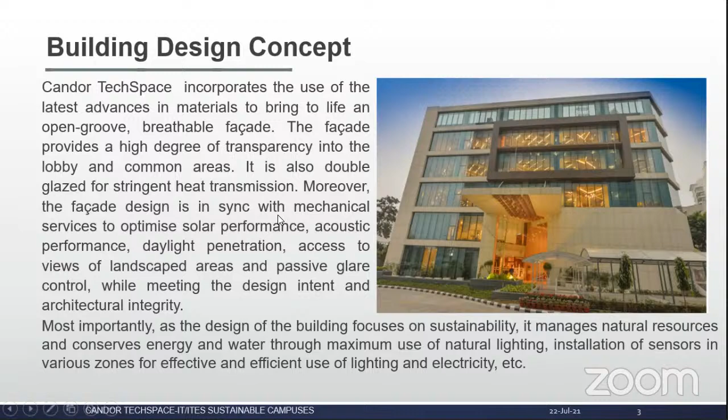For increasing water efficiency, in addition to using mist kind of sprinklers in all our common areas and washrooms, we have for the last 3 years implemented drip irrigation systems in all our horticulture across all campuses. In Candor campuses, the conventional water system for horticulture areas and green belts has been converted to drip irrigation. Drip irrigation saves water by allowing it to drip slowly to the root of the plants, and since the water goes directly to the plant's root, it minimizes evaporation.

Indeed, in Candor campuses, the drip irrigation system versus sprinkler-based facility has resulted in almost 50% reduction of water usage for horticulture purposes. We have also done metering so that we exactly measure the resulting outcome, because if we can measure something, we can definitely control it - that is our belief. We have also installed efficient faucet aerators in Candor Tech Space campuses, replacing inefficient ones with water-efficient aerators to lessen water use.

Next, water efficiency development for green belts. Candor Tech Space campuses have designated green belts or planned open spaces that are safeguarded from construction activities. The objective behind promoting the development of green belts around campuses has been to increase water entrapment areas. Also, green belts reduce suspended particles in the air since dust settles down with the grass cover. Native species of plants have been planted in these green belts to increase natural recharging of groundwater through rainfall.

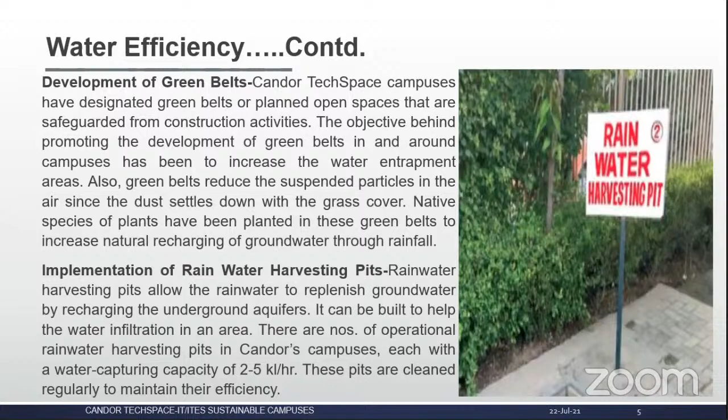Ongoing with this is the sewage treatment plant based in our campuses. Most places are based on MBBR technology with tertiary units installed across Candor campuses. Candor reuses 100% of the STP treated water within the premises - in fact, for all our horticulture and process uses, we use STP treated water. 100% of wastewater from flushing is treated to make it reusable for horticulture, flushing, and cooling tower makeup water requirements. The quality of treated wastewater is tested through an NABL accredited laboratory to meet the standards as per Central Pollution Control Board regulations.

The next is energy efficiency. As everybody is aware, whatever we save, even 1 kilowatt hour of energy would reduce almost 233 grams of carbon emissions. With this awareness, there are regular training classes being conducted at all Candor campuses.

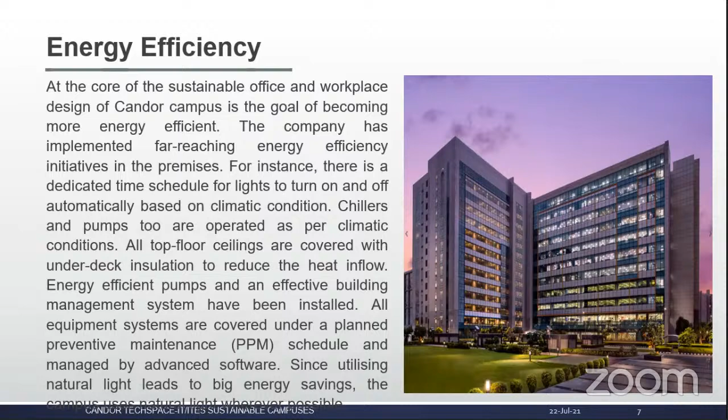In all our campuses, we have a centrally chilled water plant by which we manage the air conditioning load of the occupied offices. We have chillers, and almost everywhere we have centrifugal chillers with the environment friendly refrigerant R134A. To combat the direct effect, the chiller employs the most environmentally friendly medium pressure refrigerant available, R134A, with no ozone depletion potential and no phase out date per the Montreal Protocol. Utilizing R134A achieves better results than the soon to be phased out HCFC-123.

When using the US Green Building Council's template EAC4 to calculate the refrigerant impact on the project, the heat exchanger utilized on the chiller introduces a proprietary falling film evaporator design that helps operate more efficiently but also allows us to reduce our refrigerant charge by up to 30% beyond conventional chiller charge. We have also installed an automatic tube cleaning system so that descaling problems are overruled and minimized. Therefore, the repeated descaling process is not required in the advanced chillers.

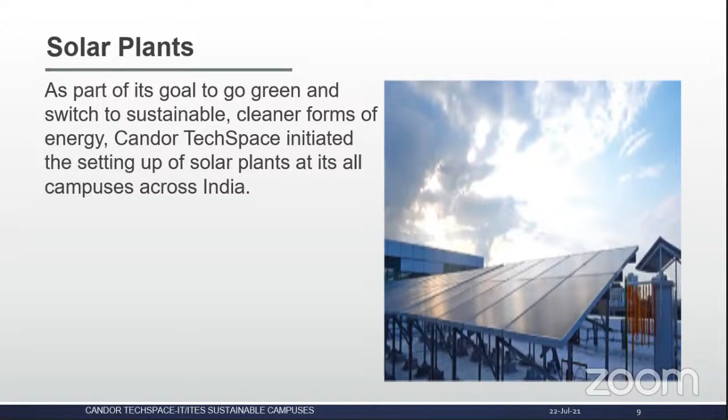Everyone is aware of city bus services. With this mindset, we also introduced a service called Shuttle, which is a service provider who provides buses on a contractual basis. We started this every year — Candor India signs and renews a contract with the shuttle service provider. The employees of the campuses are educated about Candor's Green Campus guidelines, and the same has to be followed by the employees. This guideline clearly states the provision of the shuttle service as a recommended practice.

The shuttle service greatly reduces dependency on personal automobiles as well as informal modes of transportation, causing a huge reduction in environmental pollution as well as unavoidable traffic jams. In this way, we also assure last mile connectivity for all employees to the metro or bus station.

This idea came because we have very limited parking in our campuses. Although we have a planned capacity of 1,000 square feet per car, going up to almost 3,400 to 4,200 car parks dedicated in each campus, even so we were not able to cater to the traffic of cars, and there used to be traffic jams in the campuses itself.

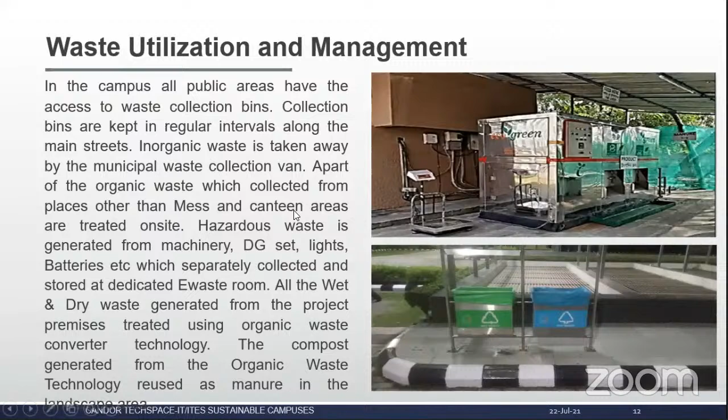We also zeroed down on waste utilization and management in all our campuses. All public areas have access to waste collection bins, kept at regular intervals along main streets. Inorganic waste is taken away by municipal waste collection. Organic waste collected from places other than mess and canteen areas is treated on site. Hazardous waste from machinery, DG sets, lights, batteries etc. is separately collected and stored at a dedicated e-waste room. All wet and dry waste from the project premises is treated using organic waste converter technology, with OWC capacity of 500 to 1200 kgs per day installed at our campuses. The compost generated is reused as manure in landscaping areas, which has reduced wet waste disposal from the campuses.

A usual problem we face is when one client exits the campus and a new client comes in, the old material is very difficult to reuse. But wherever possible, we try to reuse usable items like glass, carpet, frames, ACP sheets, and removed doors. Old furniture is also being reused.

We have also made it a part of policy that we will use only Green Seal rated products or green supply chain management, to reduce exposure of building occupants and maintenance personnel to potentially hazardous chemicals. As Dr. Prashant Pandey has said, we use, not maximum but 100%, Diversey chemicals - green certified chemicals. Candor aims to progressively move towards 100% sustainable cleaning procedures, products and equipment, and we will take help from Diversey to make SOPs so that we don't miss anything.

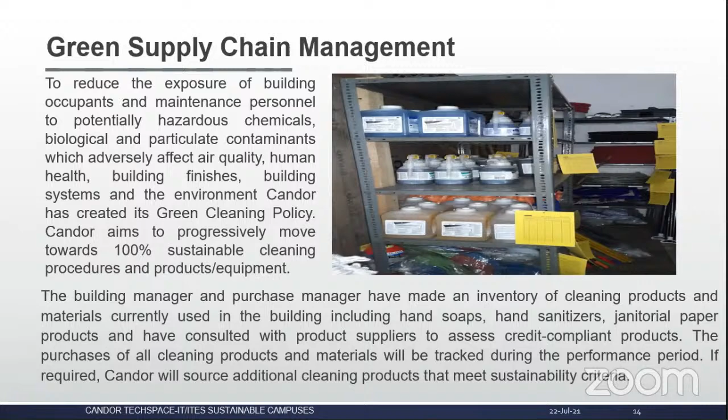In our plantation drives and horticulture, we try to maintain user-friendly horticulture spaces so all occupants feel happy visiting the campuses, which also helps in the well-being of occupants and visitors. We also have a plantation drive where we encourage everyone visiting our campuses and give them free native trees, which they can take home and plant in their colony or nearby gardens managed by their RWAs.

Although I have covered almost all uses in buildings, maybe what I felt yesterday when talking to Hemant - we were of the opinion, as Mr. Anil Chopra has already covered, that we spend more than 80 to 90% of our time indoors without full control over the potential cleaning chemicals being used, the air conditioned space we have, or the filtration methodology we are using.

Offices, airports, gymnasiums, stadiums, daycare facilities and many other types of buildings gain significant financial, health and environmental benefits simply by using Green Seal certified products and cleaning services. The idea is better indoor air quality - less dust, less airborne bacteria, low or no VOC wherever possible and feasible, lower rates of illness, fever, asthma attacks, and better lung function. In this pandemic we have come to know the impact of having these in place - smaller footprint, reduced energy use, less waste, fewer toxins released. These are the basic needs driving us to go for GreenPro certified products.